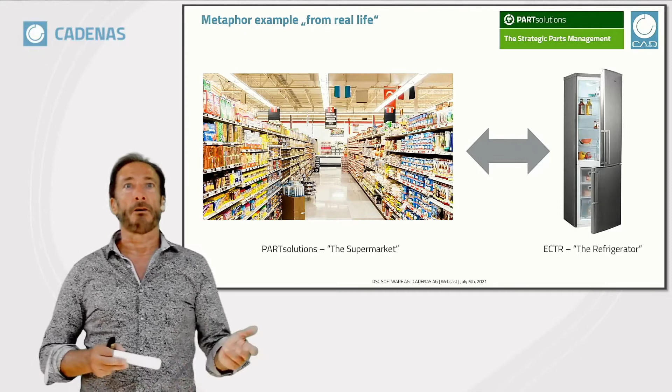So what we also have is a connected world between these two systems. That means, if you stay in a supermarket, the app of the supermarket knows what's inside your fridge, and it will also guide you and tell you, I already have these goods or these products, or it knows what are the favorite brands of your family so that you buy the right things. And from the supermarket, you fill your fridge from time to time if you want to cook a meal.

So we also have intelligent find methods. The app of the supermarket can also tell you through a search, for example, you need these goods to prepare this meal. So they also help you select the right things in engineering, or if you want to provide a meal.

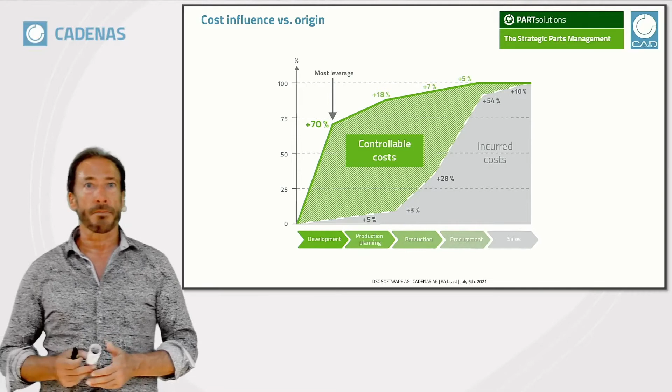There you have to go back to the roots - that's engineering. Inside engineering, you cannot really decrease the costs directly in euros, but you can influence the decrease mostly in the engineering process. In the engineering process, by reusing parts, you can save your company a lot of money. So if you take a standard part instead of a self-made or company-specific part, or if you reduce the number of purchase parts, you have a big cost saving.

I want to show you this in two charts on this slide. On the left side you see a part - many of us have already modeled a part, so it causes you maybe 15 to 30 minutes to model this part. Maybe in your company it would mean $50 or $100. Most people think this, but the reality looks different.

So to model these parts takes less effort, but at the end, if you see what you additionally need as documents to really manufacture these parts - you need a fixture, maybe some special tools to manufacture it, some special plans, a life cycle documentation - most companies have 100, 200 documents to make this part, and that will lead very, very fast to tremendous costs. Tremendous costs you can see here in another chart.

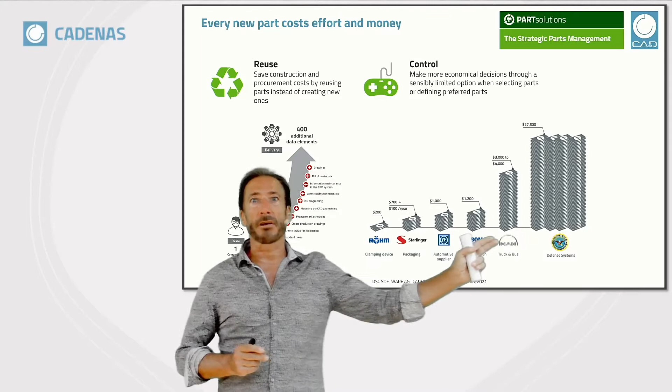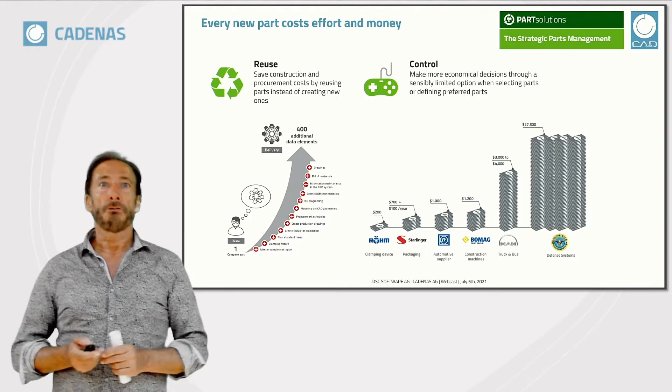It depends whether you make a machine or maybe you're in defense, where people might get in contact with your products, where you risk the life of people. So you see it starts at €200 or $200 and goes up to maybe 20 or 30,000 dollars. So the goal is, of course, that you reuse parts, that you start to generate fewer parts.

Let's go through a user journey. It starts at the top where you see a magenta part, and there's an engineer. He needs a part, so his first goal is, of course, to search inside the internal parts world, inside the fridge. You also see that search and find components often needs a lot of time. We investigated that 25% of time is dedicated to finding information - that's 10 years in your working life.

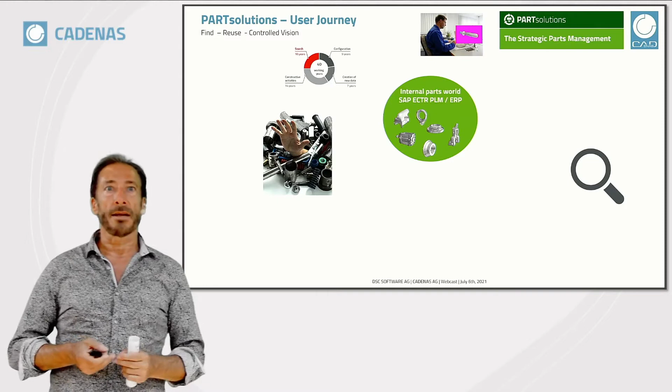Of course, here the problem starts because these people need a lot of time to find these parts - they don't even start to search for them. And what happens? You get more parts and it turns into a parts jungle. So how do we want to solve this? CADENAS invented very cool functionalities - not a simple text search, but a shape search in 3D.

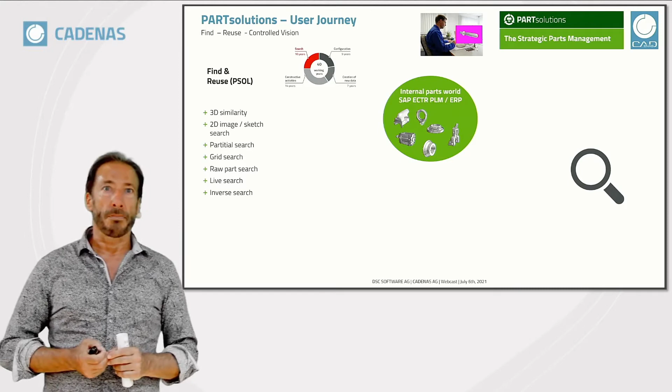You even can call it partial shape search, where you select a couple of topologies and then you get similar objects having this same topology. Or you make a picture with your iPhone, or you sketch something with a pen, and then you get instantly good hints. We're also working on predictive engineering, where we try to tell you what's the next part. So those are intelligent methods to find the parts.

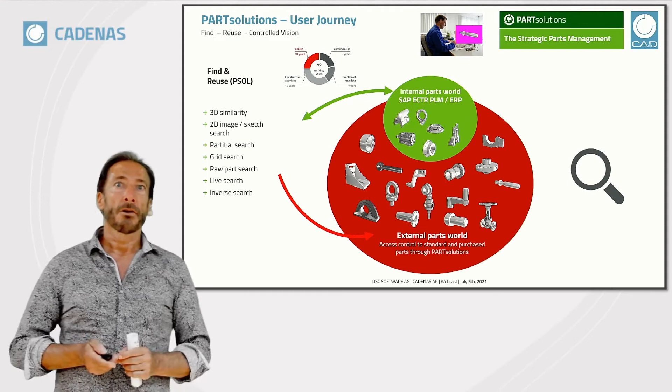So your goal, of course, is also to find these parts inside ECTR in the internal parts world. And whenever you can't find it with these methods, you also can go to the external parts world, what we call a supermarket. So then you select it, and most people think it's now going automatically in the fridge or in the PLM system, but that's not how it is. We also have the purchasing department, we also have the material experience department, and these departments also need to give their knowledge, and if all parties agree, then it moves in the internal parts world.

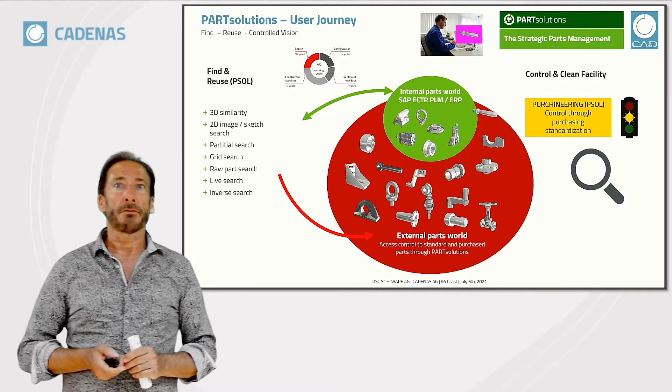So far the user journey, so I hand this controller over to Anne. Thanks, Jürgen. So Anne will show us the UI and of course the processes.

Yes, so again, on the left-hand side, you see CADENAS PARTsolutions, the supermarket with a lot of parts available. This means catalogs, standard parts. And on the other hand side, SAP, the refrigerator Jürgen mentioned, with a selected number of parts which are necessary to support your processes. So very often the designers start in CAD, they search for a part, they find it in CADENAS, and the next step is to bring them into the SAP system to be used in further processes.

On the other hand side, there are parts created with a CAD system in SAP and managed there. CADENAS doesn't know it. So what are we doing? The triangle you see in the background is an information flow, also a transfer of data from one system to the next, and that's exactly what we would like to present to you with various scenarios we have prepared and live demos about this specific solution.

Jürgen has mentioned on the CADENAS side a lot of different search capabilities, and we will focus later on especially one. It's the geometrical similarity search, which we would use in two scenarios, engineering and also for the order process. Other techniques are also available in SAP, which are very specific for SAP, and most of you already know them, so I don't want to take too much time to explain them to you as well.

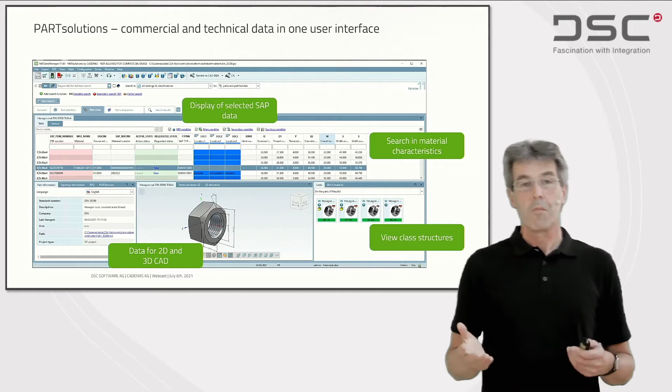Furthermore, there are 3D previews available here for the nut and also similar parts that are visible here. Furthermore, a lot of information, in case of a catalog part, from the manufacturer. So in ECTR, how does it look? We also manage the parts that are created with CADENAS PARTsolutions, and we also have additional information.

So when we start on the left-hand side, you see here the Engineering Control Center with the folder structures. Folders can be used for search purposes. The master data as well, which you see here. The classification of the objects, either document or material classification. Above, you see preview pictures, so it's a graphical navigation through an SAP class hierarchy, which is also possible. Furthermore, you can search for the connected objects or the related objects via object links. So this is how to find a document, or an object that's related to a project or to a customer order and so on.

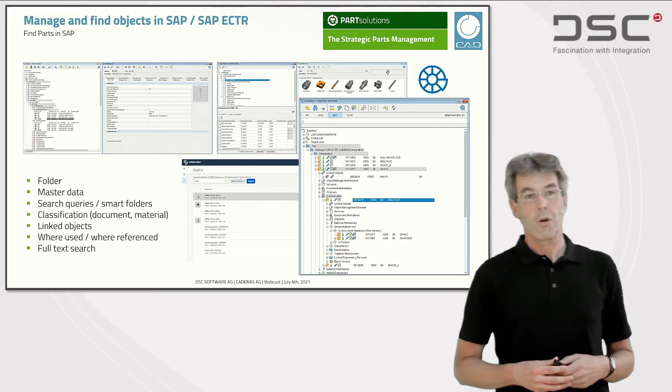And on the other hand side, you see there is another screen. It's the so-called Crosspoint for full text search. It's another product of DSC allowing to search for documents such as PDF drawings, but also emails or specifications. So this means office documents and others.

To make you familiar with what happens in the next scenarios which we prepared, we first give you an overview, also with a live presentation. So we start on the upper left-hand side with the CADENAS window in Engineering Control Center, where we display all the catalogs which are available here. This is only a selection of several hundreds of catalogs available.

We navigate into the catalog. We are here for the bolts. Once we have found a specific bolt, we can use it. You can also use the catalogs, or parts of the catalogs, that are already available in Engineering Control Center. This is presented here.

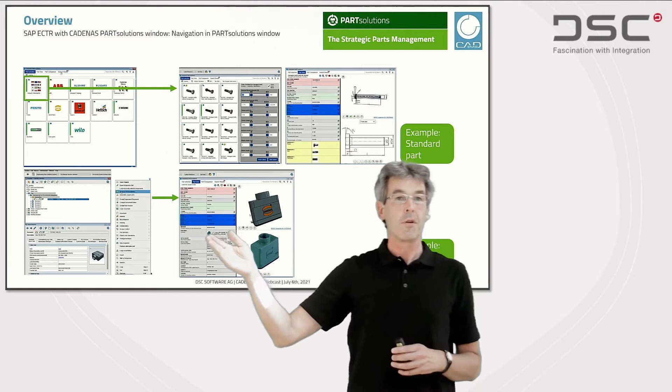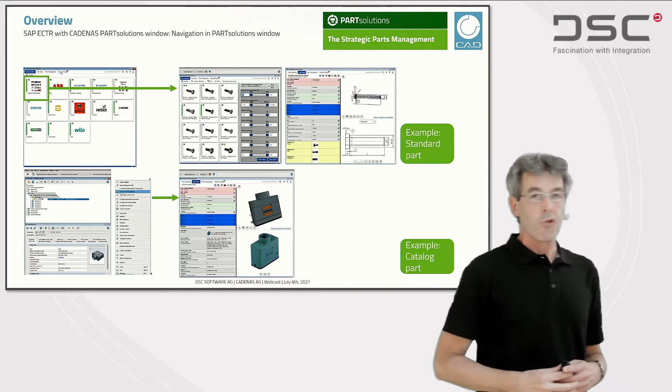There's a specific command, and you can display all the relevant information for this part. Here we selected a Harting connector, and you get all the manufacturer information regarding this specific part. These two situations will be shown by my colleague Stefan from Engineering now.

Now we would like to show you the different possibilities and advantages of the integration solution PARTsolutions for SAP ECTR. We will do this directly in the system. I will start with the SAP ECTR interface. From here, I have an online view of SAP based on the corresponding SAP authorizations.

On the left side, I see the desktop window. This window shows the mapping of folders, folder structures, objects in folders, and/or materials or documents. On the right side, we can see the object browser window. This displays the master data for the documents selected in the desktop. For example, the classification, a visual preview, or various information on the structure.

In the following, I will show you the object browser, the desktop, and the CADENAS PARTsolutions window. For this purpose, I've already created my own layout. In the CADENAS window, I can see various catalogs. There are catalogs for standard parts in accordance with DIN and manufacturer catalogs available. Here, I only see a small selection.

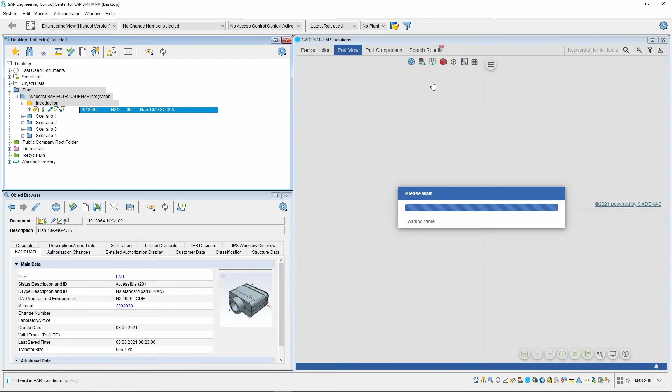Via the Open in PARTsolutions function, directly from the SAP ECTR desktop, I can display a part in a corresponding manufacturer catalog. In the CADENAS PARTsolutions window, I find the part. On selecting this, I can see the master data, text information, and 2D or 3D views. In this case, I have selected a plug from the Harting manufacturer catalog.

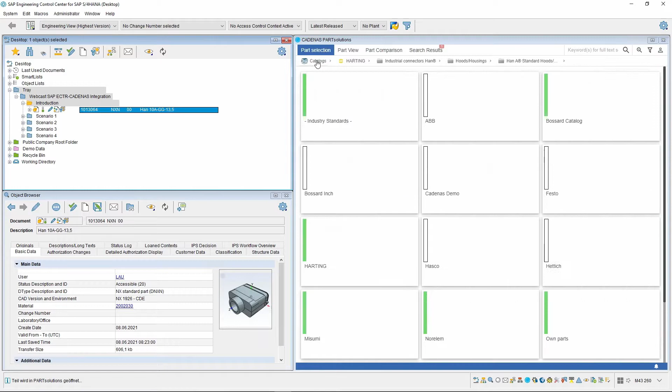I navigate back to the start page in the CADENAS PARTsolutions window and select the DIN standard parts catalog. Here, I search for a hexagon head screw. On the right side, various filter options are displayed for pre-selection, which I can scale via a slider. The individual values are dependent on each other. In other words, there are dependencies.

I specify that the diameter of the bolt should be between 9 and 10 mm. Subsequently, a selection of the bolts appears that corresponds to my search criteria. I decide on the first search result. Also here, we can see the master data and further information.

Well, thank you, Stefan, for this overview. Now let's go to the scenarios. So first of all, we would like to show you the process from the supermarket to the fridge. So this means how do we create parts and how they are available in an SAP system. There are two ways. The one starts in Engineering Control Center, the other one in the CAD system.

For our demos, we use NX as a CAD system, but as Jürgen mentioned already, you can also have another CAD system at your fingertips and create different CAD files. No problem. CADENAS is a multi-CAD system. SAP can also manage multi-CAD files and tools.

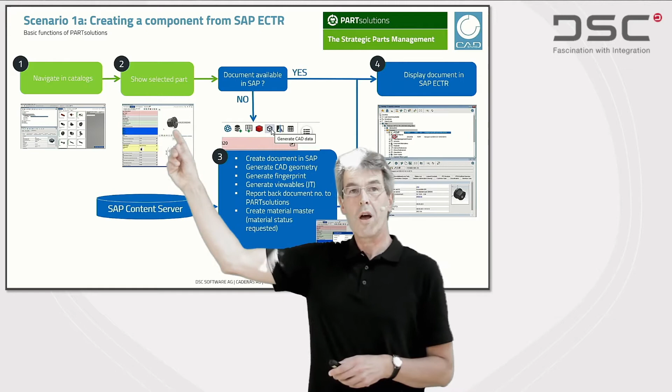So here again, we start on the left-hand side in Engineering Control Center. That's the first way to create new parts. We find a part, and as you can see here, the blue area is empty, so the part is not yet managed in an SAP system, and this means we have to create the part if we would like to see it in SAP as well.

There's a command in CADENAS PARTsolutions to generate a CAD file, and a lot of things happen in the background. These are described in area 3. We create a document info record in SAP. So we transfer the geometry from CADENAS to SAP. We also create a JT preview picture.

Furthermore, we generate a fingerprint which we will use for geometrical similarity search, and something that's not very typical: immediately, we also create a material master for this specific document. To make sure that it's not used for purchasing and other purposes, we classified it to be in request, and this is very transparent for all the people involved.

If this process is run and done, what happens? The part is available in SAP, and that is the result. It can be seen in Engineering Control Center as a document related to a material master, and we can display the master data. Again, Stefan, please show us how this looks in reality.

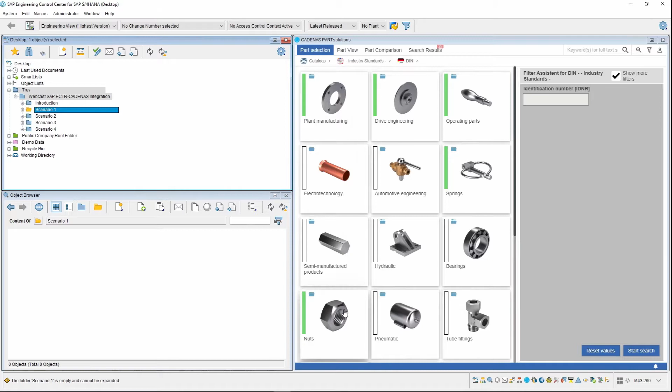To create a part from SAP ECTR, I switch to the CADENAS PARTsolutions window and select the DIN standard parts catalog. I would like to create a hexagon nut. To do so, I first select the nuts catalog and then the hexagon nuts catalog. To restrict the number of search results, I use the sliders to change the thread diameter from 9 to 12 mm and start the search.

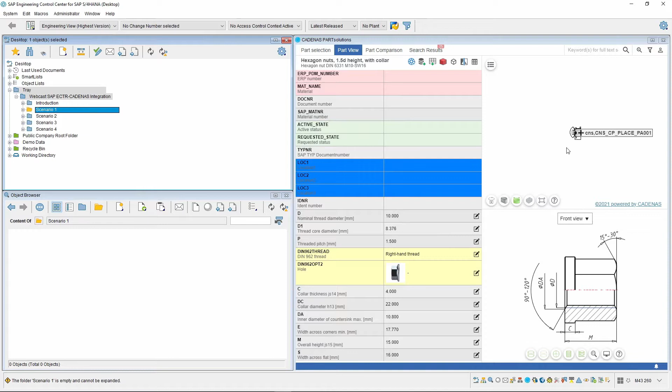I select the nut in accordance with DIN 6331 with an M10 thread. In the CADENAS PARTsolutions window, I see that the master data is still empty. This means that the geometry has not yet been created and stored in the SAP system. That's why I now create the nut. I create it using the button Add Dataset to Link Database.

In the process, I create an ERP number. In the dialog, I specify the material of the nut and the availability in the different locations or in the different plants. In this case, I select the material 25 chromium molybdenum 4 and availability of the nuts in locations 1 and 3. PARTsolutions automatically creates the ERP number and applies the selected material and availability.

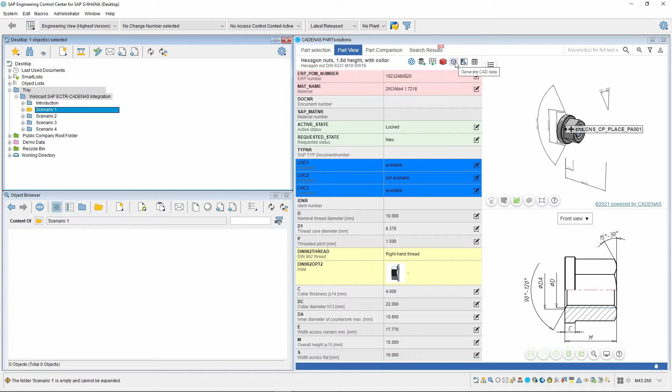In the next step, I create the CAD data for the nut. To do this, I select the function Generate CAD Data. In the NX window that appears, I can see that the geometry was created as a feature-based NX construction. We have set up our system so that a material master is created at the same time. Of course, it is possible to modify this, and it depends on your respective process.

First, I enter the core data for the material and the material status. Our standards management decides on the usage. That's why I assign status 00 or waiting for approval. On clicking Save, I finish creating the nut.

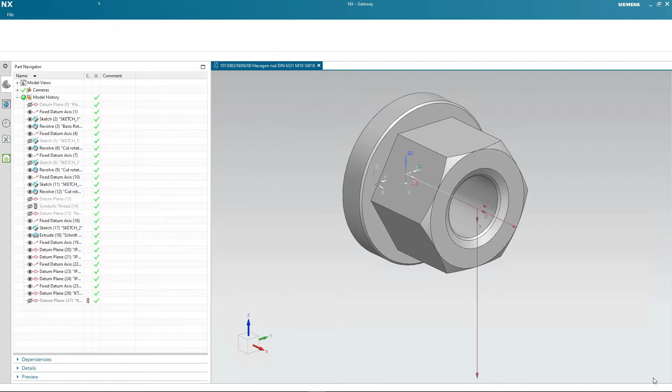In SAP ECTR, I can now see the document for the nut. From the material symbol, I see directly that the respective material has also been linked. I find it in the linked objects container. From the color of the material symbol, I can tell that currently it has not been released. Via SAP ECTR, macros or search functions, it is possible to submit this type of documents to standard management for verification in so-called work lists.

Well, thanks Stefan for explaining to us how this works.

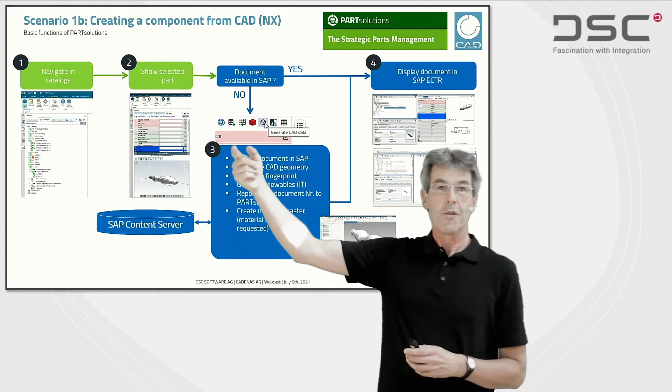Now let's concentrate on another aspect to create parts and bring them into SAP. In this situation, we would like to start in the CAD system. This means in NX. As you can see here on the left-hand side, this is the classification from CADENAS. Here again, you see the window where you can select the parts. So all the catalogs are available in NX in a so-called seamless way. So you don't have the idea of searching in CADENAS PARTsolutions. It's directly integrated in NX.

And then again, the same things happen as you have seen before. So the question is, is the part available in SAP already? No, since the blue area is empty, no real information from SAP inside. So the background process starts again when you select to generate the part, and again the part is transferred to SAP, the 3D geometry, the document info record created, and furthermore, as I mentioned, the creation of a material master is done, and at the end you will see the result in Engineering Control Center.

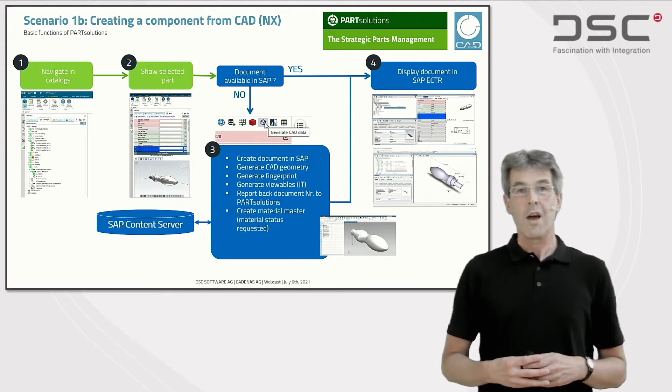The part is available, the master data is managed, you get the information in the blue area about the SAP information, and furthermore the 3D part, the JT file we created, is also available. And this JT part or VDS, it depends on what you would like to have for downstream processes, is available for all the rest of the people allowed to access this data in your company. And again, Stefan, please show us how this process is run.

To create a part from NX, I activate the Seamless function in the PARTsolutions menu. I switch to the Catalogs tab. The catalogs are shown in the Seamless bar. I navigate to the Hasco catalog and look at the catalog parts there.

Then I switch to the Search tab. Here I enter a term to search directly in the catalogs. In this case, I search for a handle. The list of search results is displayed directly below the search. The results are sorted according to occurrence or alphabetically. I can see from the green marking that these parts are already in the catalog.

I decide on a handle from the Bossard catalog. The master data for a handle with an M6 thread has already been created. However, I would like to create a handle with an M10 thread. After changing the thread size, I see that there is no master data available for the handle. This means that the handle with these characteristics has not yet been created.

To create the handle, I select the function Generate CAD data. This system is set up so that it automatically creates a material master when a part is created from NX. I maintain the material master data and the material status accordingly.

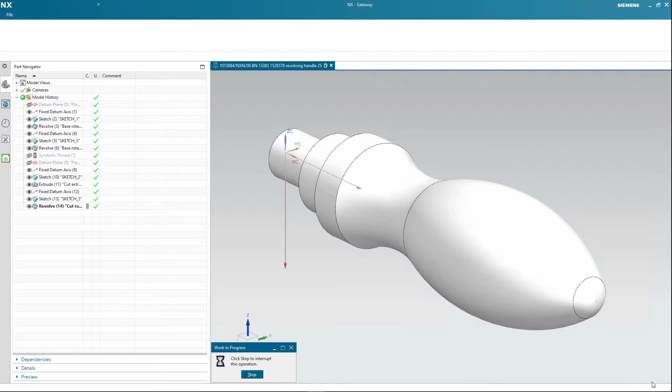Clicking on Save creates the part. After creating the handle, it is displayed in NX. On the left side, I see that the part was created as a feature-based NX construction.

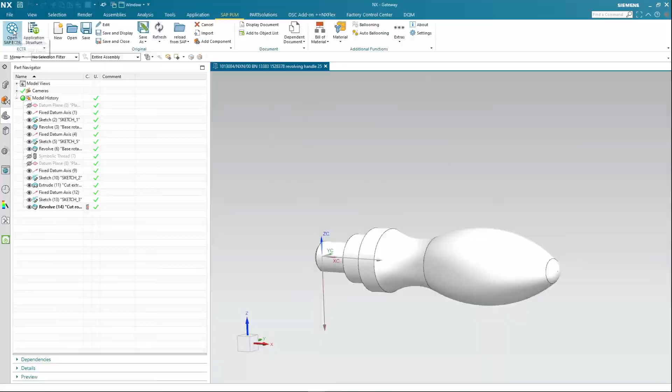Using the SAP PLM tab, I switch back to SAP ECTR. We can now see the handle in the active folder. In the object browser, we can see the handle's master data.

Via the context menu, I open the handle in the CADENAS PARTsolutions window. Here, I see that the material and the location availability are missing. I complete both. For the material, I select the steel 25 chromium molybdenum 4 and specify that the handle is available at locations 1 and 2.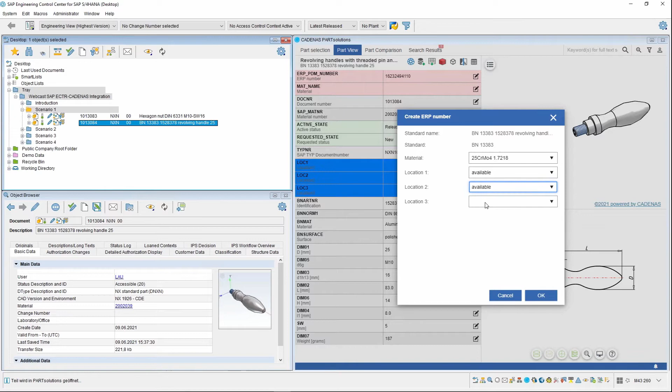Thanks, Stefan. Now we have seen how parts have been created, so the parts are already in an SAP system now. So what happens next? Jürgen mentioned part management is used to find, to reuse parts that allow you to make most value out of this kind of thing. So what we are now showing to you is how to use components that already exist in SAP and how we are using them in our design work.

And here again, let's start using a component that exists in SAP already. We start on the left-hand side in Engineering Control Center and select an assembly. And with this red rectangle, this is a component we would like to replace with another one that exists in SAP. Again, we use search capabilities in NX seamlessly. We replace one handle with another one, and the result, you can see here, is a new assembly.

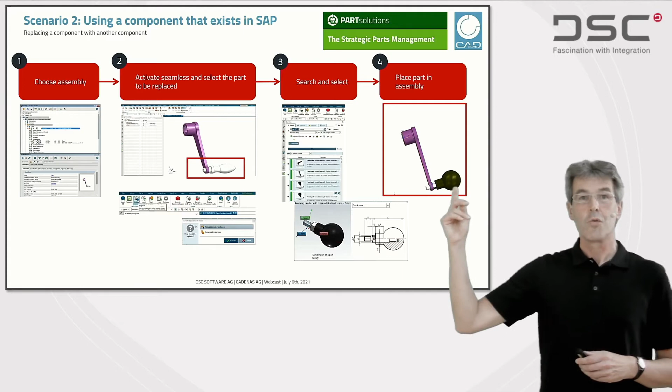But that's not all. We would also like to show you, here with the color blue, to apply also Engineering Control Center in this little user story or process. Using the Add Component dialog or command in Engineering Control Center for the NX integration, we directly open ECTR, open this window you already have seen. It's the CADENAS PARTsolutions window. Search for a component in the CADENAS PARTsolutions window and select this nut you see here and place it in our CAD system.

And what's very important, that's behind me, it's the bill of material. Since we're in an SAP system, replacing one component with another one allows us also to maintain the bill of material automatically. Furthermore, quantities, if you position two nuts, would appear in the BOM. So it's a transparent process. My colleague Stefan will now present to you.

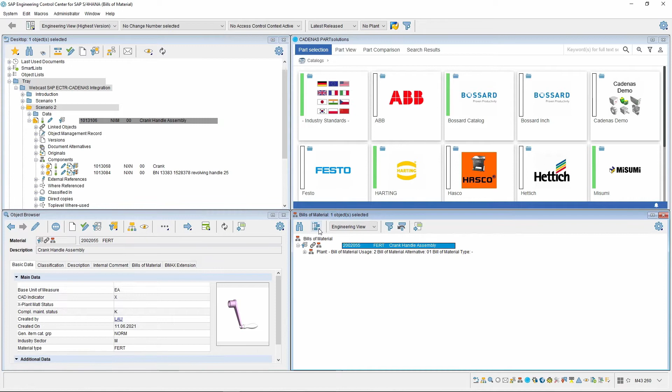First, I display the master data of the crank handle assembly in the object browser. Then, in the components container, I have a look at the information on the individually installed components. In the Bills of Material window, I display the respective bill of material. For this purpose, I drag and drop the assembly here. Clicking on Expand All displays the complete structure of the bill of material.

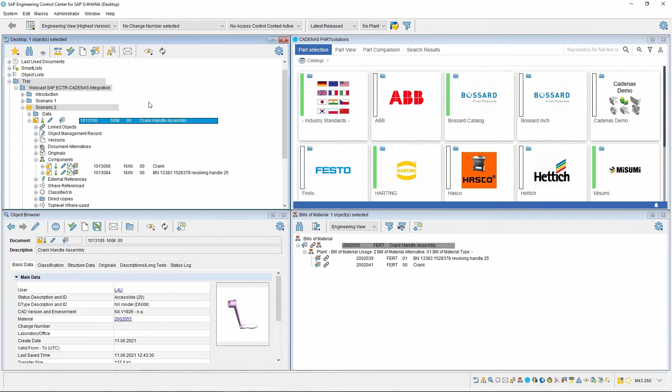I see that the handle has material status 01 and that the material symbol is colored red. Consequently, the handle may no longer be used. The crank handle has the status 00 and still needs to be released. To exchange the handle, I open the crank handle assembly to be edited in NX. I would like to replace the handle with a different model to be used for all new products.

Therefore, I switch to the CADENAS PARTsolutions tab, select the handle, and then select the replace function for the selected instance of the handle. The previous handle and its master data are displayed in the seamless bar of the window. I switch to the Search tab and search for the handle. I restrict the search by only looking in the Bossard catalog.

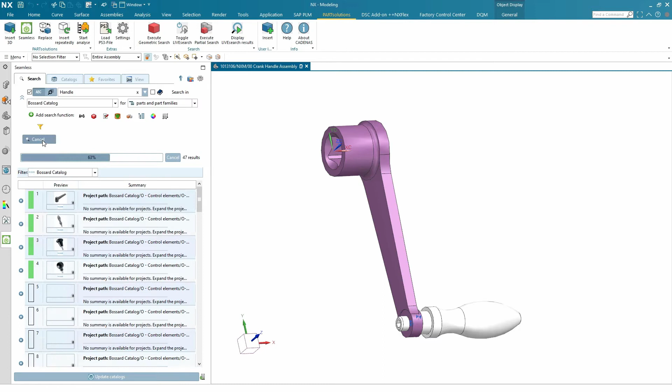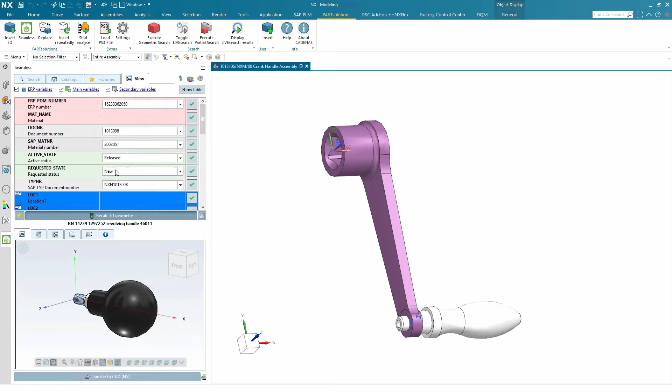I look at the visual preview of a revolving handle with a screw in diameter M10 that is already available in the SAP system and select it. By clicking on Transfer to CAD, the handle is incorporated in the design or is replaced. The handle is not yet in the correct position. That's why I modify the assembly constraints.

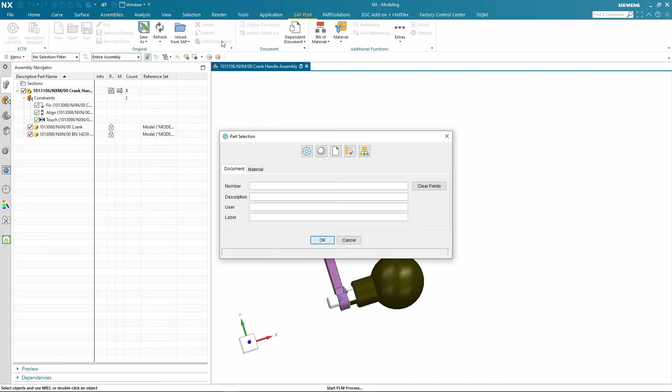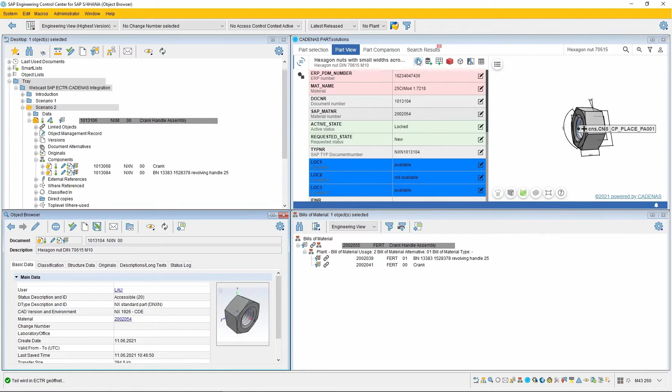From the metadata, I see that the nut already exists in the subsystem. The diameter, or DA, of 10 mm is also correct. I open the nut in SAP ECTR using the function Open in ECTR. The nut is now visible in the object browser. Via the context menu, I open the nut in NX. Using the Part to Place dialog, I put the nut in the right place.

Finally, I save and close the assembly and go back to SAP ECTR. Here, I update the document structure. The hexagon nut and the new handle are now visible in the components container of the crank handle assembly.

I update the BOM in the Bill of Material window. Here I can also see the newly installed components. All items of the Bill of Material have the status 00 and still need to be released.

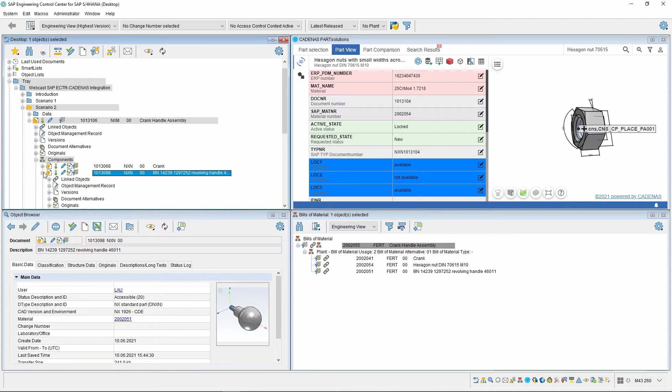I have a look to see where the new handle is also used. I can see this in the Where Referenced container. After expanding the container, I see that 3 other assemblies also use the handle.

Thank you, Stefan. For the live presentation so far and also for the next scenarios, we are using NX, as you have mentioned. So some of you not only use NX but perhaps another system instead or several of the systems. One feature of CADENAS and also of SAP is to manage data from various CAD systems.

How is this done? So in SAP we manage for each of the CAD systems a so-called document info record. Also CADENAS knows that for each of the components there is a file available. And starting in Solid Edge, you will always open a Solid Edge file and not an NX file.

That's one advantage. Another advantage is you have one material but several CAD or output formats. That's handled in SAP. So Multi CAD, CADENAS, Multi CAD, SAP is a very strong factor for parts management.

Now let's have a look at search capabilities that are a specific feature of CADENAS and how we could use them with SAP. Therefore, we start in engineering with creating a new part and how geometric similarity search supports us in this process. This can be done starting right away in design with a sketch, for instance,

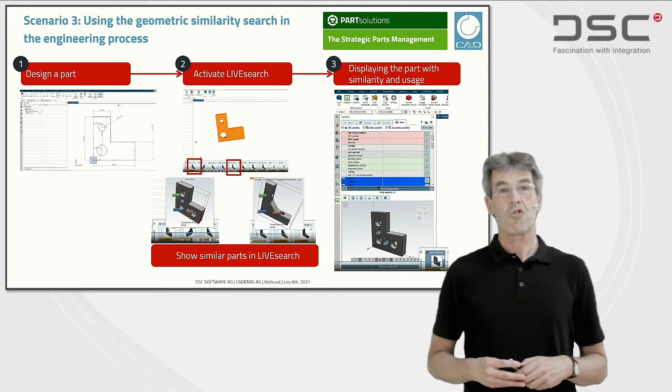In NX, I create a new part. In this case, we need a bracket with several drill holes with different diameters. For this purpose, I modify the sketch and add an additional drill hole.

To save time, I check if there are already similar parts in the system. To do so, I activate the live search. I find a bracket that is a 78% match to my design. I check it out in the visual preview. To compare, I also have a look at the bracket that matches only 75%.

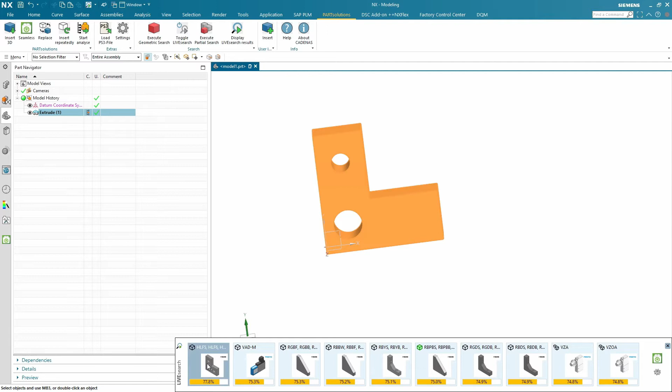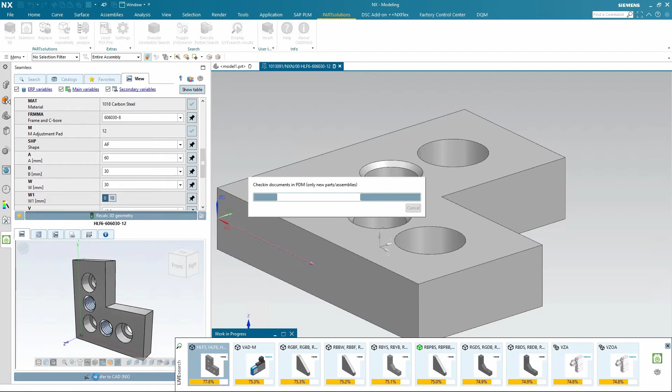I select the 78% match. It is now visible in the seamless window. There is no metadata maintained for the part yet, so I need to create the part in SAP accordingly. After creating the bracket, it is available in both the CAD system and in SAP ECTR.

Well done. So the next scenario we will focus on is based on a keyword Jürgen has mentioned in the introduction part. It was about purchasing. So this specific keyword has the aspect of purchasing or the offering process. And here again, we would like to show in an example how geometric similarity search can be used for this specific purpose.

So let's suppose a customer sends you a 3D part, a step file, and asks you to provide him with a proposal and a price for this specific product which he would like you to manufacture for him. Very interesting. And now the big challenge for the purchasing department is, did we already do something like this? Was it complicated? What have been the costs?

Do we have NC programs to determine costs? Do we have tools which we can also use in our calculation of the costs? What has been the price we have sold the product for? Do we have specifications describing more or less the material that's used for it, and so forth? So how can this be resolved?

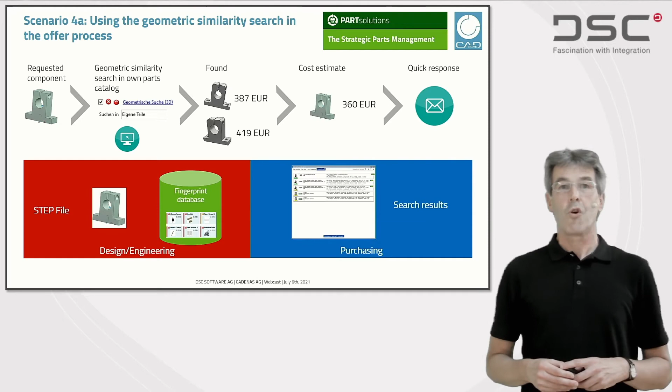There will be search results shown in the table, sorted so that the highest similarity is on top, which is the part itself, and then it decreases with diminishing similarity. That's the process that happens, and at the end, determining the price is done with a material search in SAP.

The first step we want to show is the engineer's part. My colleague from purchasing receives the step file and passes it over to my colleague Stefan, who will do the import functionality, then create the fingerprint in the middle, provide it into the CADENAS self-made part library, and allow it to use the geometric similarity search. Okay, my two colleagues, please start.

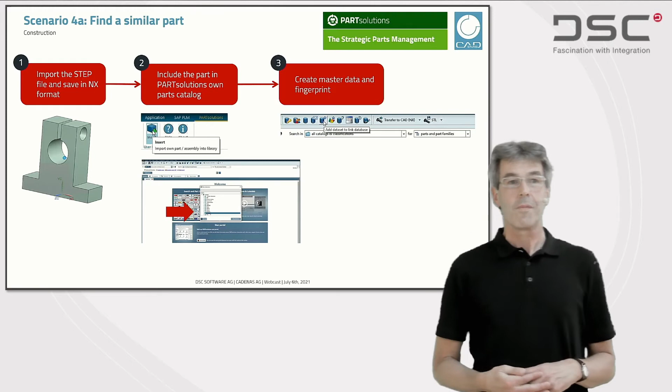I get a request for a quotation from a customer to create and deliver a part called shaft support. The customer has given me a step file for the part. I pass the part onto the design engineering department so they can create a fingerprint. I open the part shaft support in NX and save it in the SAP system using the function import on demand.

Then I switch to the CADENAS PARTsolutions tab and use the insert function to save the file in the PARTsolutions database.

I store the part in the own parts catalog and use the add dataset to link database function to create an ERP number.

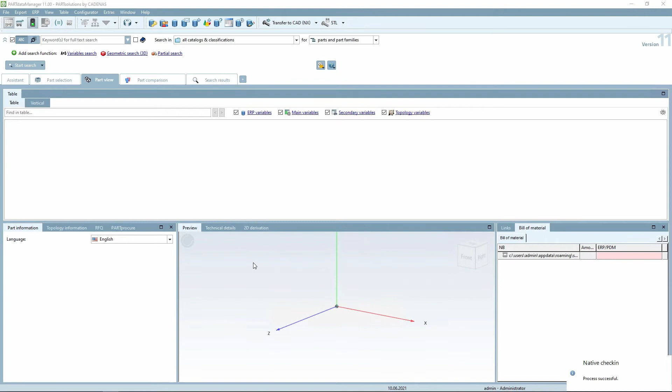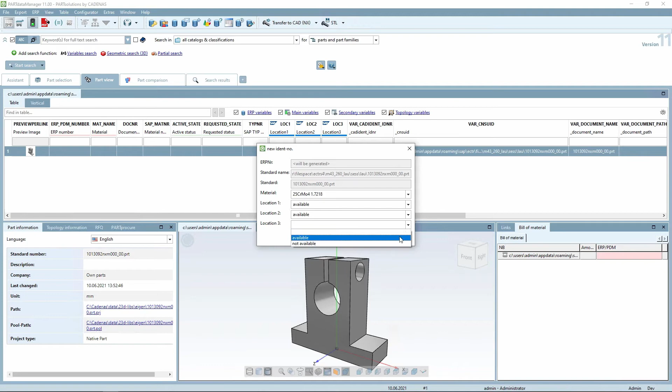I now specify the material and the location availability. In this case, I decide on 25 chromium molybdenum 4 and an availability at the locations 1, 2, and 3. I have now entered the part in the own parts catalog. It is also possible to use other folders such as special customers.

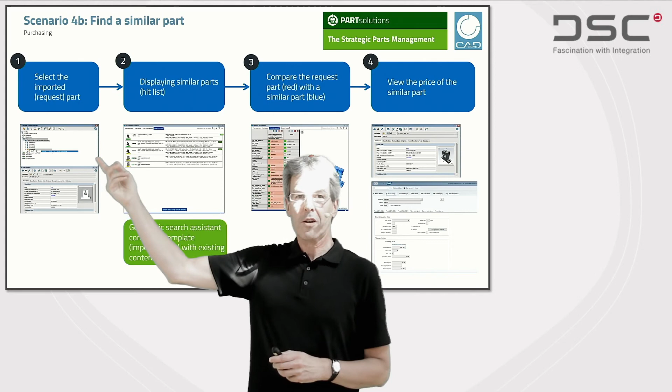Now the part is available for the geometrical similarity search. I'm in the purchase department in this case, and how does the purchase manager start? He will use Engineering Control Center to open this part and use it for geometrical similarity search to get the hit list.

Very importantly, you have capabilities in CADENAS PARTsolutions to compare the parts: the one you received from your customer, shown in red, and the one most similar to it. That's very interesting on a geometrical way. You see that there are holes missing, that the dimensions are slightly different, and you have a lot of further information in this metadata comparison.

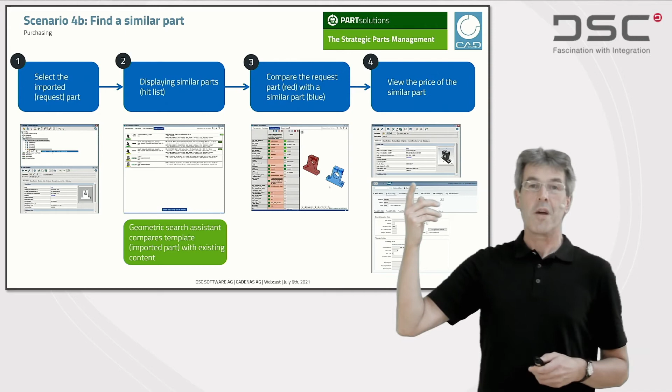What's very important, and was the main question using this geometrical similarity search, is the material and further information behind it. So the starting point is the part. We navigate into SAP and find the material that is most likely comparable to the part analyzed with geometrical similarity search, and this allows you to detect or provide your customer with a specific price for that product. Okay, my colleague from the purchase department will now show you how he does his job.

My colleague from Design Engineering informed me that the part Shaft Support is now available in the SAP system. I select the part and look at the metadata in the object browser. Then I start a geometric similarity search via the context menu.

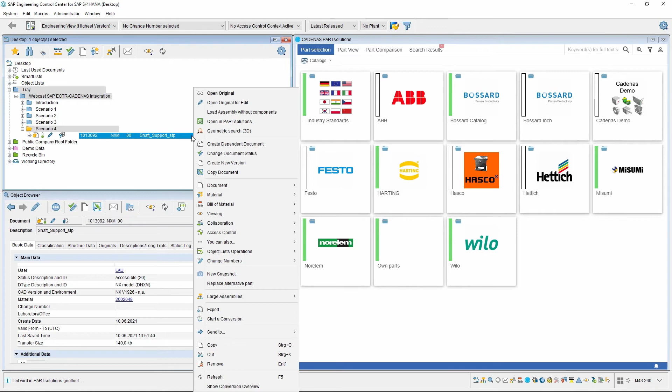5 search results are shown, pre-sorted according to similarity. The first part is the imported part with 100% similarity. The second part is with 94% similarity, a part that is already available in the catalog.

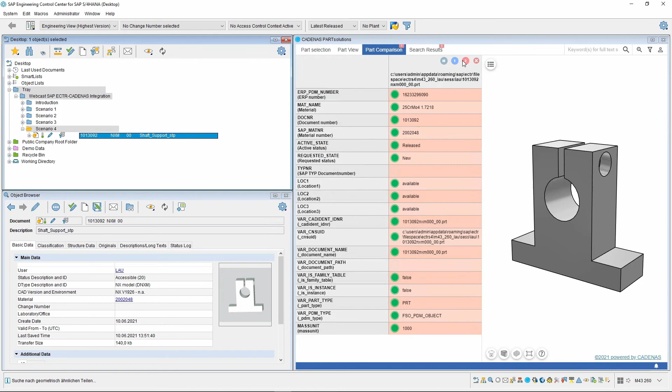I display the newly imported part in the CADENAS PARTsolutions window, then compare the imported part with one of the similar parts. I select the part with 94.5% similarity and display the metadata.

Clicking on the command to compare the two parts starts a comparison of the metadata on the left and the geometries on the right. I immediately see that the similar part has 2 additional drill holes and a bevel. To make this even clearer, I place the 2 parts on top of each other.

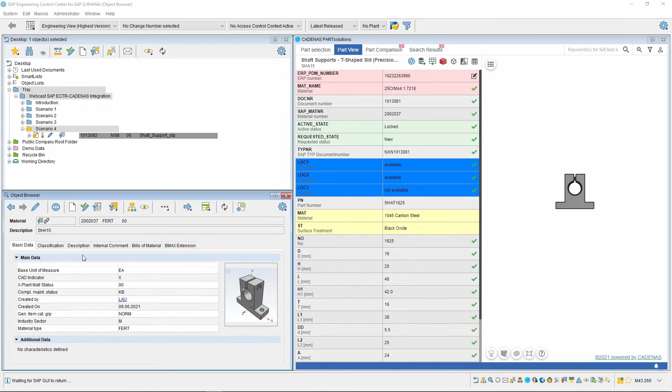I choose the part that already exists, which is 94.5% similar, and open it in the object browser of SAP ECTR. There, I select the material number, and subsequently the SAP Material Master is displayed. Via the context menu of the SAP GUI, I open the material and select the view accounting 1.

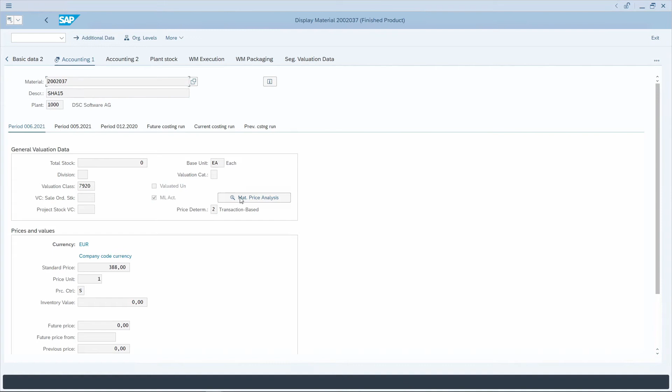Here I see the price of €388 for the location Karlsruhe. The similar part is more expensive as it has 2 additional drill holes and the bevel. The quotation based on the quantity requested by the customer is therefore around €360. At this point I could also start a price analysis query, however, as this is a demo system, I have not stored any additional information.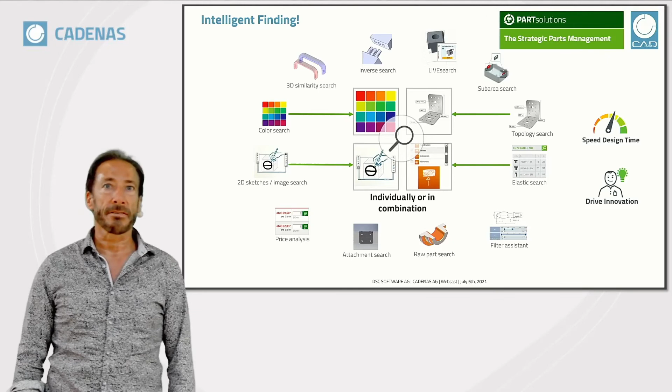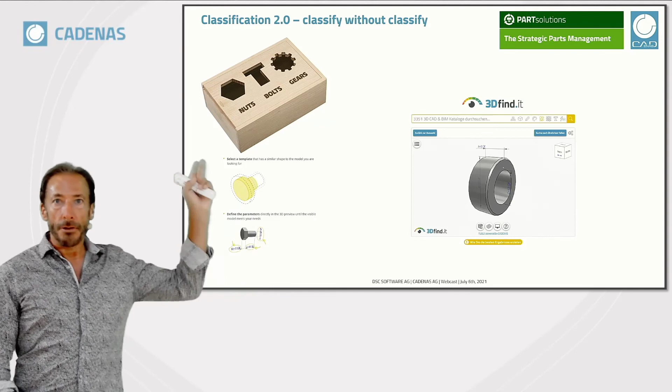Thanks for this visual demonstration, for the many reference cases shown to us. Let me mention one or two things more. We saw a lot of intelligent find information, methods to find parts, and I want to mention some additional things. We cannot show all the searches and find mechanisms today, but I want to mention two more. One is you can see at the top there's a kids game, so kids have to find the right item which is fitting in these holes.

So it's fitting in these holes. We call it classification 2.0. You define the shape of the hole. We call it classification without classifying anything.

You see a small item here, and this item, I already played this video. You can define by a geometrical class the size of these parts. Let's call it, it's like a grid. You can change the inner diameter, the outer diameter. You can make it longer or smaller, shorter, whatever you need to find. And that's the hole what you are defining.

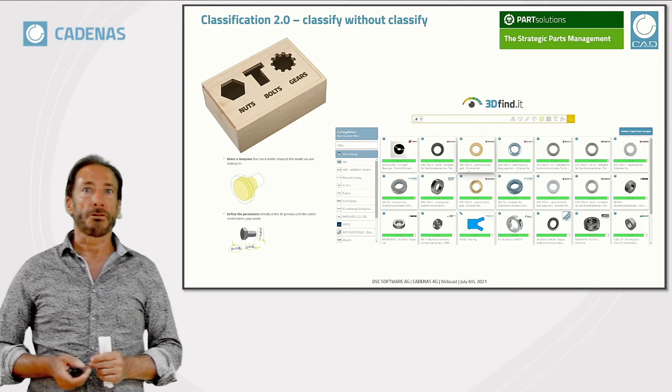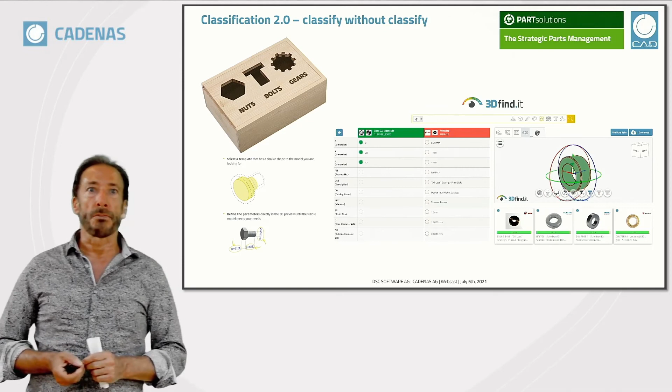Then you search through your database, and you now see the parts that fit in the hole. Here we select a part with a similarity of 95%, for example, and we also display it versus versus, and we can overlap them, bring them together. We can turn these parts, and you see the green one is what we defined, and the red one is one part that we found. So now, as a human person, I have to decide whether I can use this part or not. That's a thing I wanted to mention.

The second thing is we are often asked, hey CADENAS, Jürgen, we have some people who come fresh from college or university. They really like these new innovative methods to search and find parts. But we still have a couple of old-fashioned people inside the company, and they don't even want to use these new innovative things. They've made their way for the last 20 years, and they will also do it for the next 20 years. How can we stop, or how can we at least control these people?

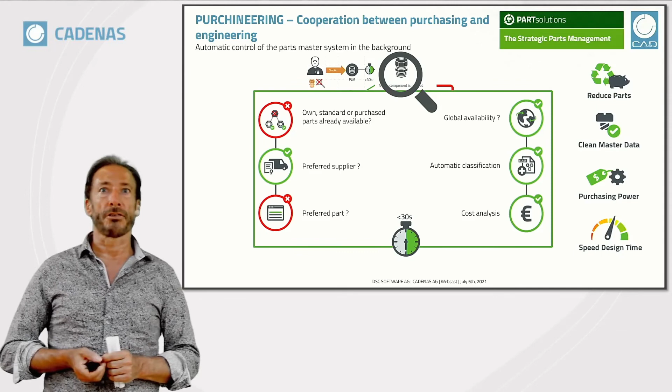So it's quite easy. We have a background mechanism. That means even if they don't search, if they start to make a new part, there are mechanisms in the background — is it a preferred supplier, is it no preferred supplier, is it maybe a duplicate part because the similarity is up to 99 or 100%. Also whether it's available in all the countries I need to use the part, for example, global sourcing. If I check in a part, all these attributes and data are available, so I can search with a background mechanism, and I can find a result in less than 30 seconds.

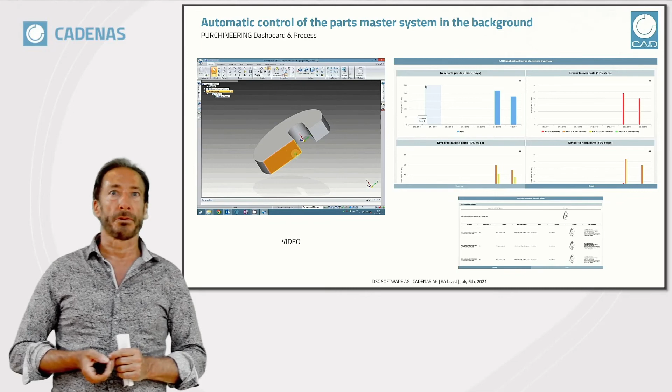So here's a video which shows this. That's a simple washer. I draw this in a CAD system. I don't take any responsibility whether it's already available or not. And later I of course can see it in a dashboard. You see on the right side the dashboard, but I also will show you another way. It's only check-in, and after you check in, there's also a process running with an emailing system.

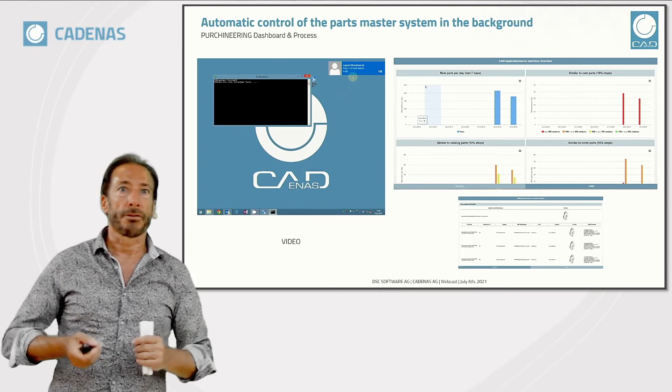You can also define emails — who should get this information? Should only the person who affected this part, or should maybe also the head of the department get this information? So here you see an email opening, and I get the information: this washer is already available as a self-made part.

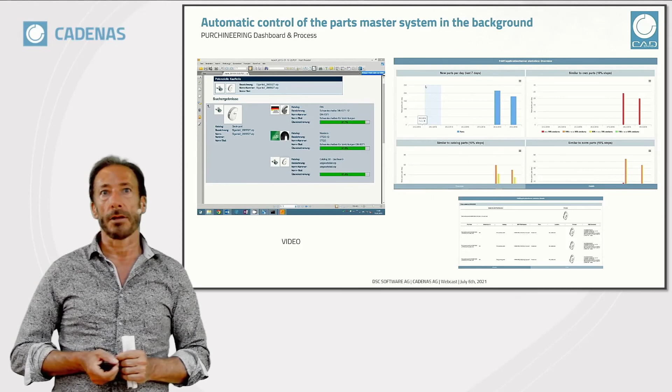It's available as a standard part. It's available as a purchase part. And here I still have the possibility to replace my new part with an existing part, because from the check-in till now it's maybe one minute, and now I can still change the way of engineering. But if I detect this part in 4 weeks, I don't have any possibility to replace it anymore. So, early bird catches the worm.

Summary: how you can profit from our solution. At the bottom, there's always the SAP Engineering Control Center. That system is the basement, and this system is the leading system. On top of this system, there's a seamless integration of the part management. This seamless integration also gives the user new functionalities. They don't have to really learn a lot and get trained for a couple of days. No, it's very easy, it's very fast that they learn these new functionalities.

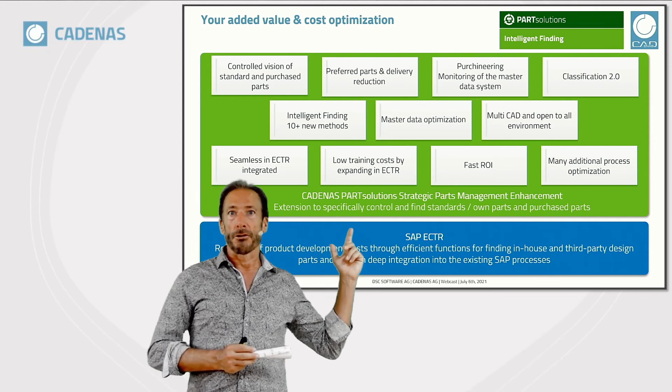So there's also a high return on investment, of course. Let me summarize a couple of functionalities. You get a controlled view to the parts world, or to the supermarket.

Not everybody can use the parts they want. There's also a control mechanism, so you get a lot of new intelligent finding methods. You also have a multi-CAD environment.

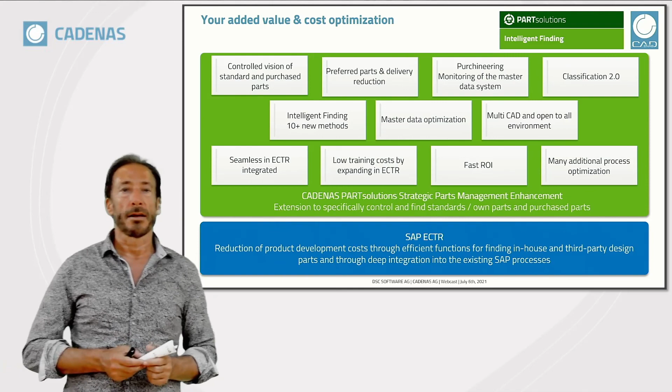We are running in a multi-CAD world, as Arne showed us. You can also use us to make your company-specific standard parts, because many manufacturers are multi-CAD enabled, so you can also build your parts world for internal standard parts using our system and provide it to different CAD systems. So there are a lot of benefits.

Arne, we've been working together almost 10 years or more, so I can summarize it: DSC with SAP ECTR and PARTsolutions by CADENAS brings you many time savings and many cost savings. Here's a last example: a customer who introduced PLM, and the number of parts still grew after introducing the PLM system. After introducing part management, the parts count got smaller. You can see the difference between what it could be and what it is today, and there's a lot of time and cost savings in that gap.

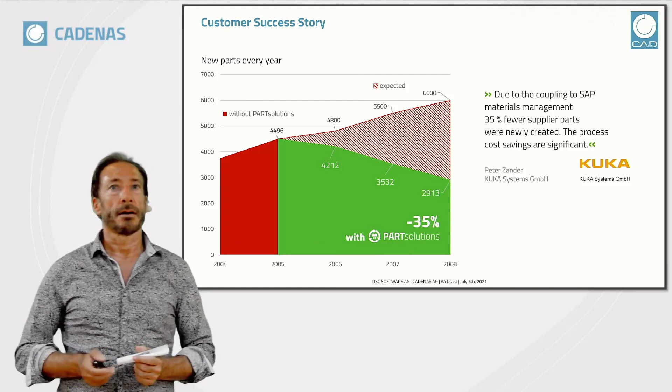Felix, did we get some questions in the meanwhile in the chat? Arne and I would of course like to answer the questions of our guests. Yes, of course. We're running a little out of time, but I think it's okay if we at least ask 2 or 3 questions, and I'll start with the first one I found.

The question is: we are using CAD Desktop and PARTsolutions. What would happen if we switch to SAP ECTR with PARTsolutions? Let me answer. Of course, we have a lot of customers still using CAD Desktop, that's a former SAP PLM integration, and we've already migrated a couple of these customers. So we have a good migration concept. Our sales and consulting teams can help you bring over the work you've already done, what you already have invested. We also have migration packages available. So simply ask your consultant or your key account - there's a good way now to migrate between CAD Desktop and the new SAP PLM ECTR system.

Okay, perfect, thank you. Next question: Do I have to save self-made parts again to use the geometrical similar search with SAP ECTR? Yes, you have to restore or create new fingerprints, and therefore you need to run a process in the background. We have to do something like this sometimes during migration work, to create JT files in the background for viewing purposes. We would do the same for creating fingerprints and checking them in. It's a background process, but it can run very fast, since the fingerprints are very small files.